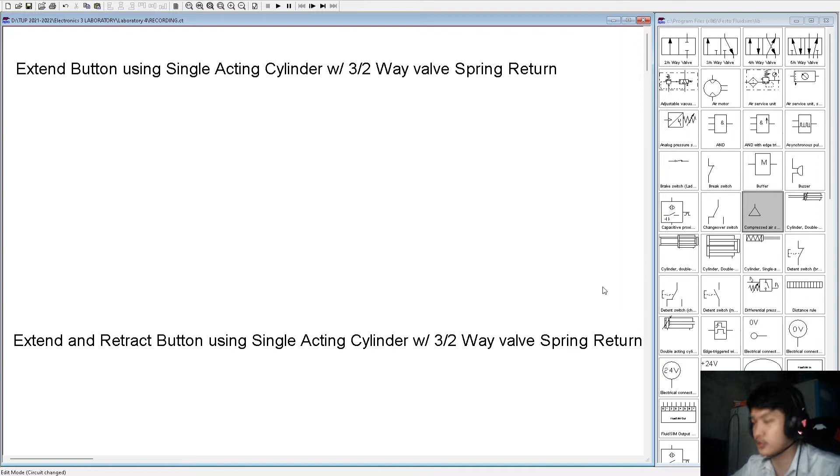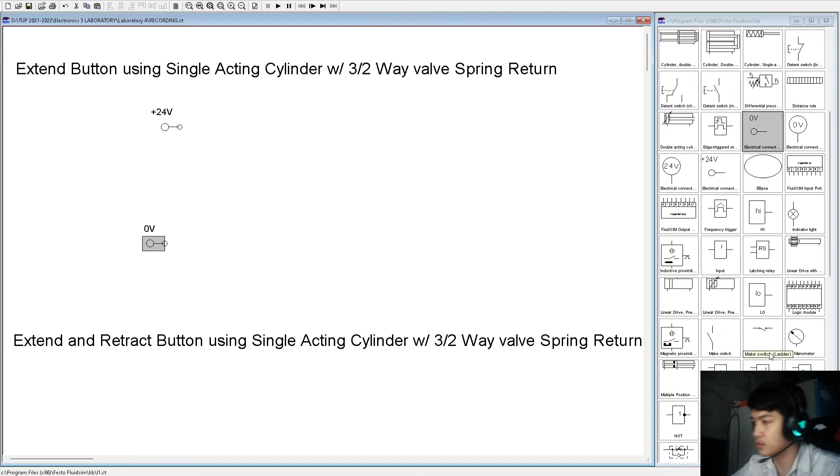Now, I'll be performing the extend button using a single acting cylinder with 3-2-way valve spring return. Now, I'll put the source, our ground, our push button, then the solenoid, our single acting cylinder, the compressed air, and the 3-2-way valve.

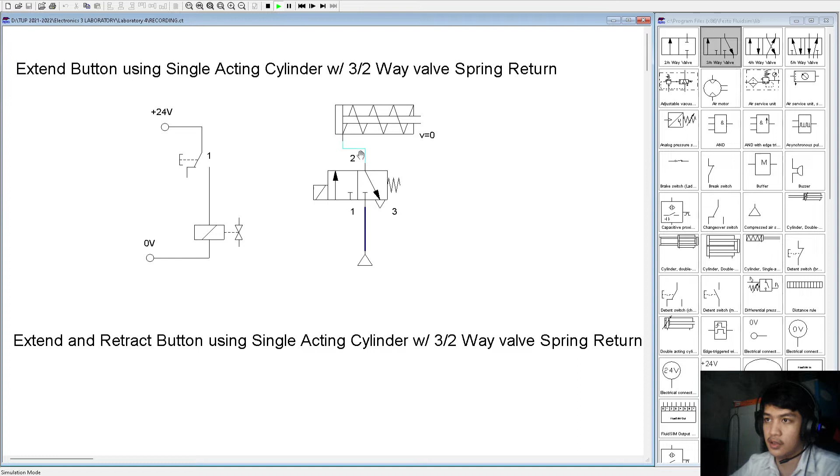So here in our 3-2-way valve, we need some electrical conductor, then a spring. So it will bounce back if our control switch is released. So now we will simulate it. As we can see, this is the compressed air, and here there is no air coming through the piston. So if we click the button,

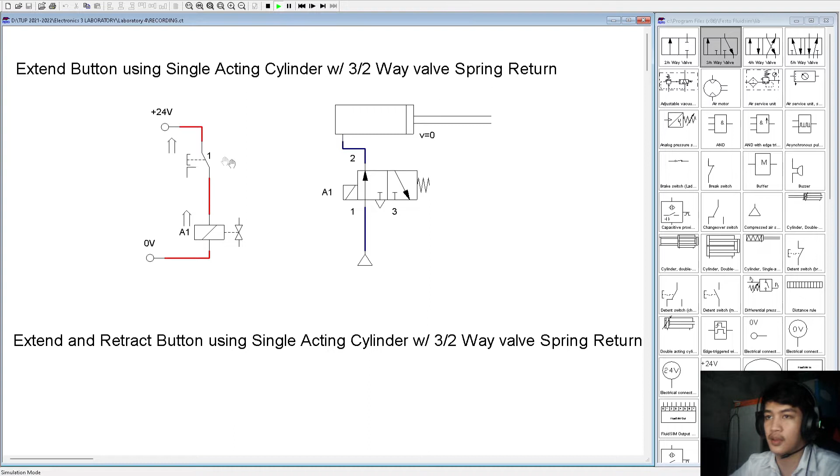we need to label our solenoid and the contactor. So this will be A1 and A1. Now, as we click our push button, it will activate the piston. And then if we release it, the piston goes back since we have this spring. If we don't have the spring, it will not go back like this. See? So we need the spring in order for it to bounce back.

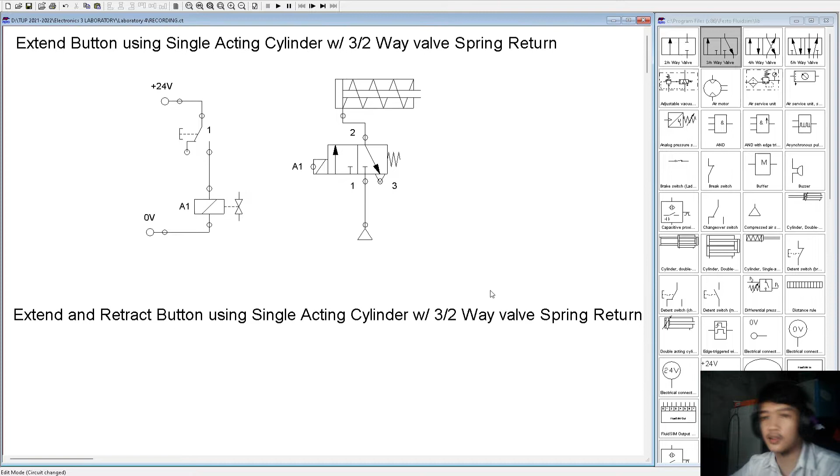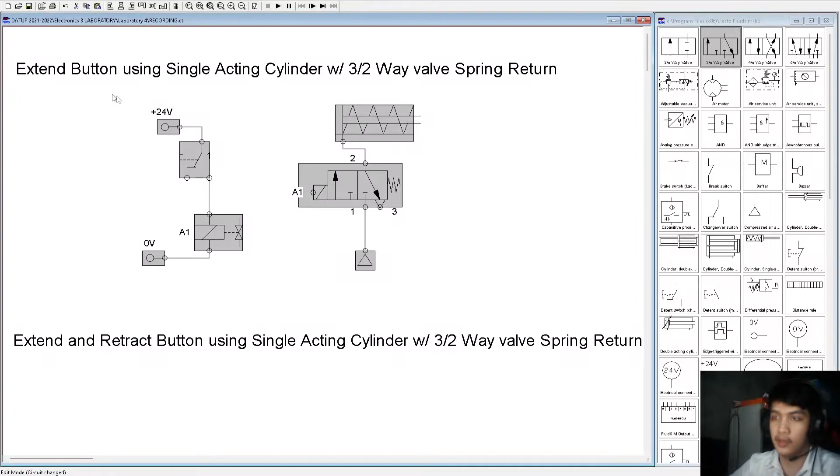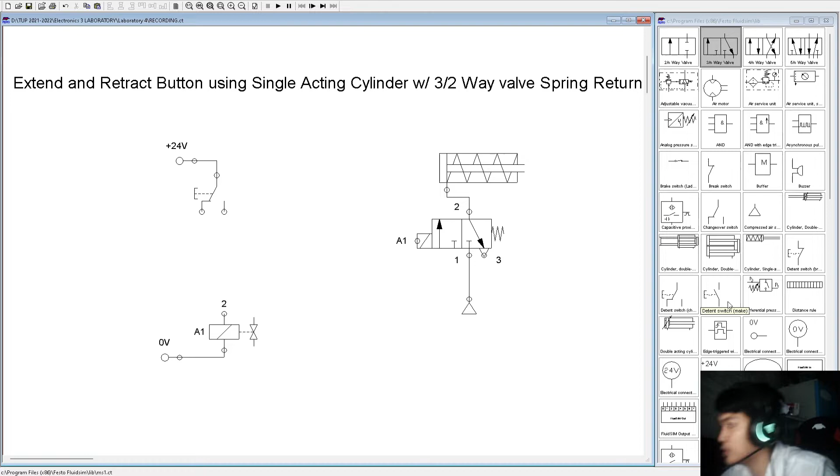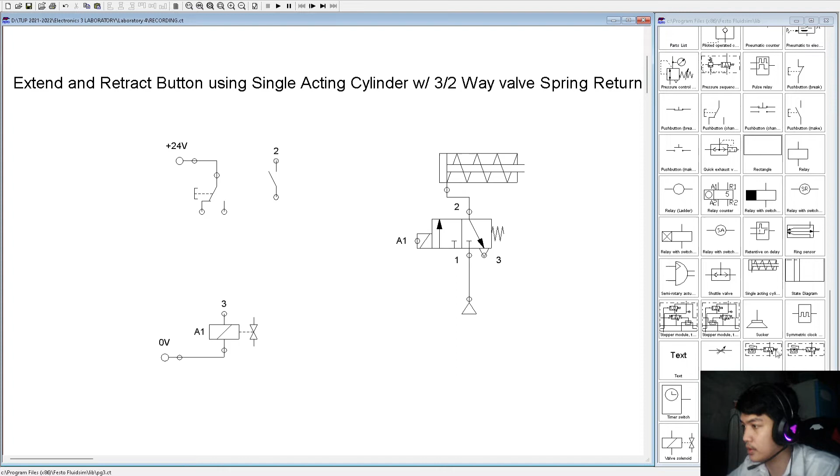Next is the extend and retract button using a single acting cylinder, also the 3-2-way valve spring return. So we will just copy this. And now in this extend and retract, we need a normally open switch, a make switch here, a relay, and another push button for the retract function.

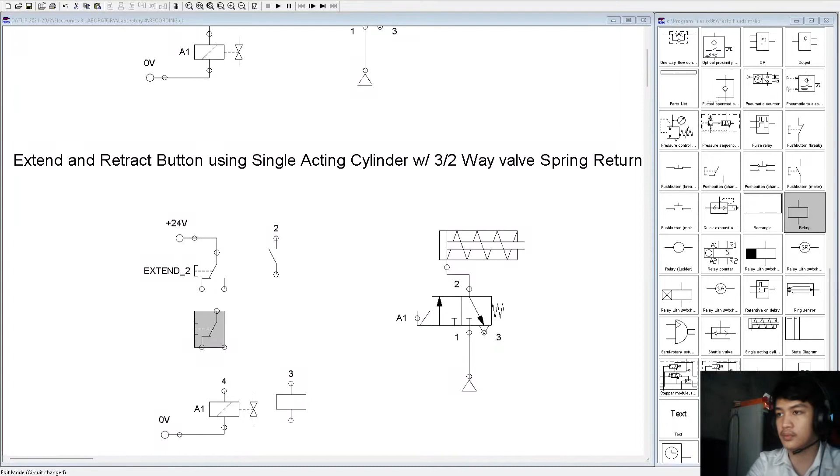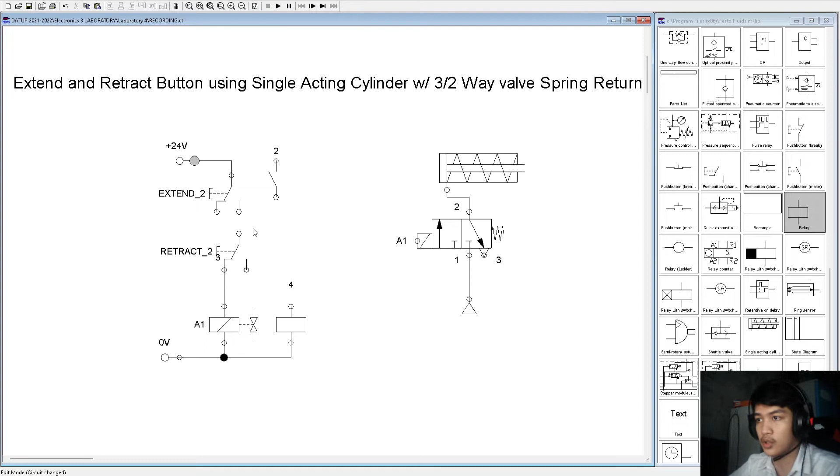I'll just label this extend 1. This is extend 2 and retract 2. Now we will connect the relay here, and this solenoid must be connected in a normally closed pattern. So connect this. This will act as a stop button. So if we put it here, then the contactor is connected here bypassing the start button, and the relay connected here.

Now we will simulate it. I'll put another label. This is B1 and K. Now, if we click this extend, this acts like a start button. So if we click this, the normally closed... Oh, I forgot to label the relay and the make switch. Okay. Now these two are 1.

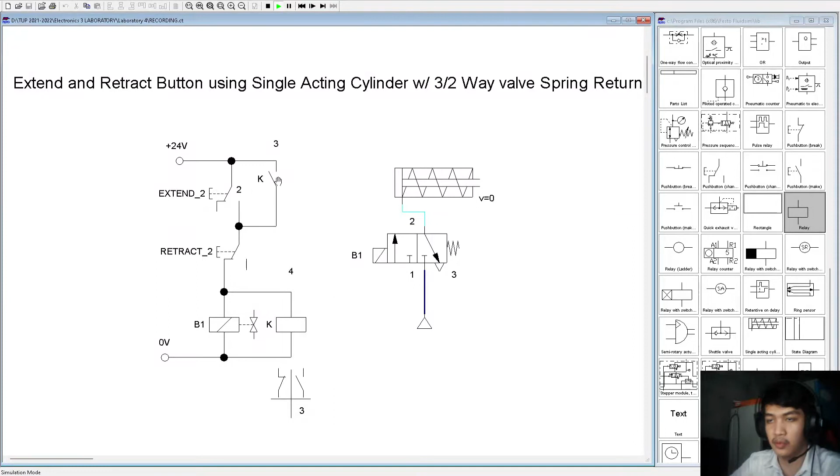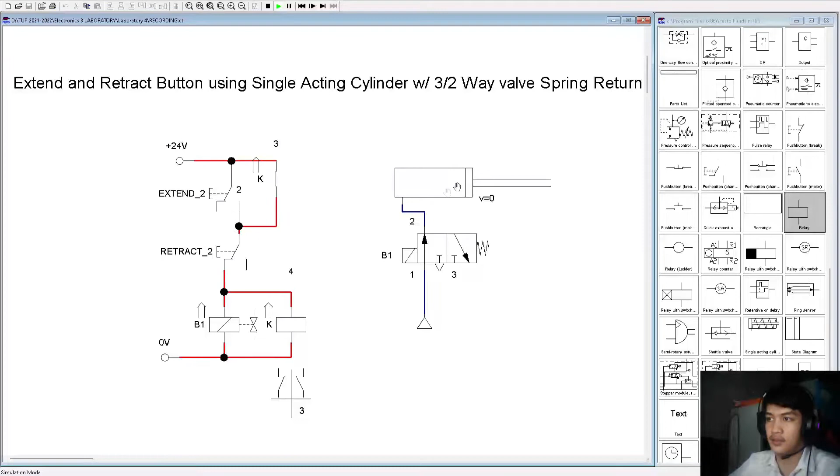Okay. So if we start the circuit, the connection from here will activate K, our relay, closing this normally open switch. So our piston will work as is, and it will not bounce back since we have a complete path of the circuit. So the retract will just cut off the connection, making it retract the piston. So it will go back here and serves like a stop button. Okay, start, extend, retract.

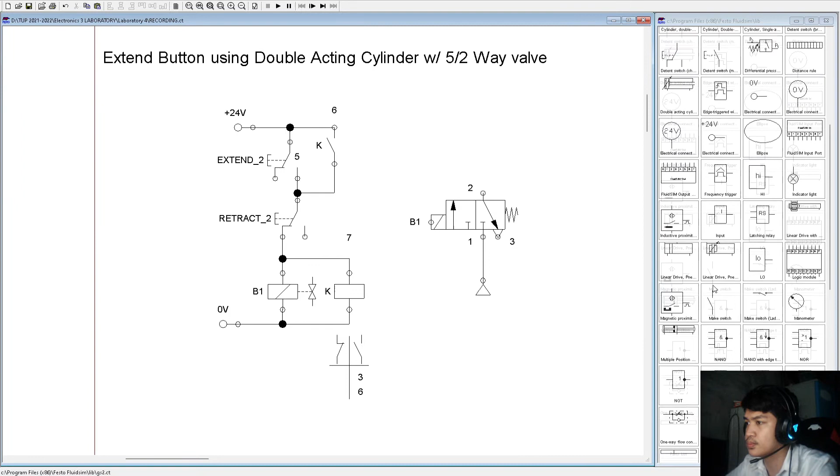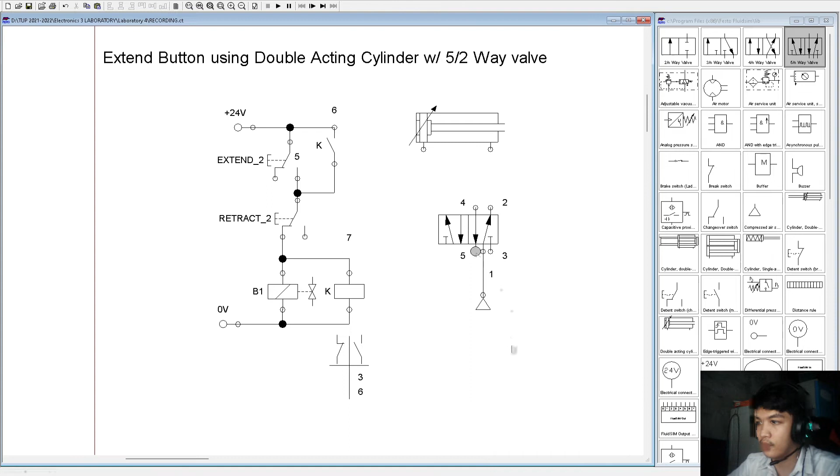Next is the extend button of double acting cylinder. So we will just replace this using our double acting cylinder. Now in double acting cylinder, we have two openings here that the air can come. Then we will replace the valve with a 5-2-way valve. Then connect the compressed air here, then the terminator in both sides, and connect it at the two ends.

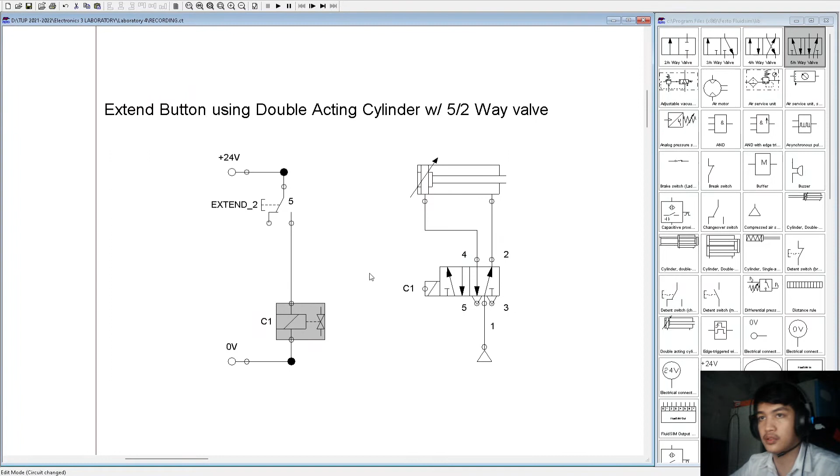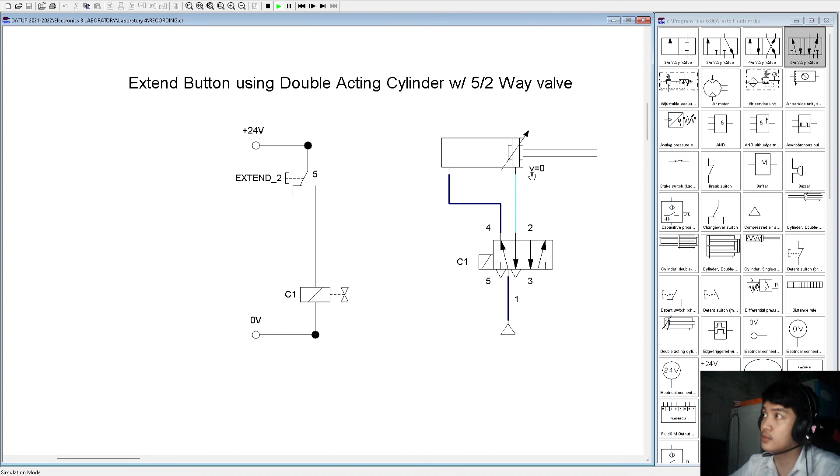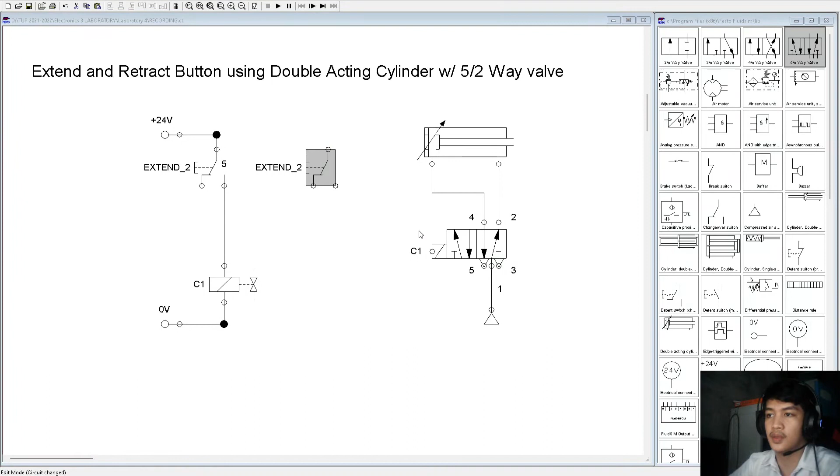So we will just copy this. Here is the extend and retract button using double acting cylinder with 5-2-way valve. We will just add some features, so the retract button will be used. I'll just connect the retract button in parallel here, and we'll just copy this. Put some solenoid here and here. Then we label it as D1 and this is D2. Connected here also.

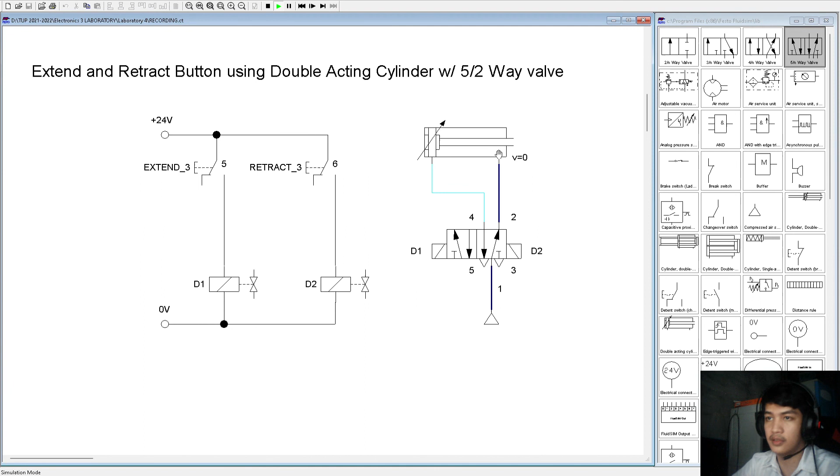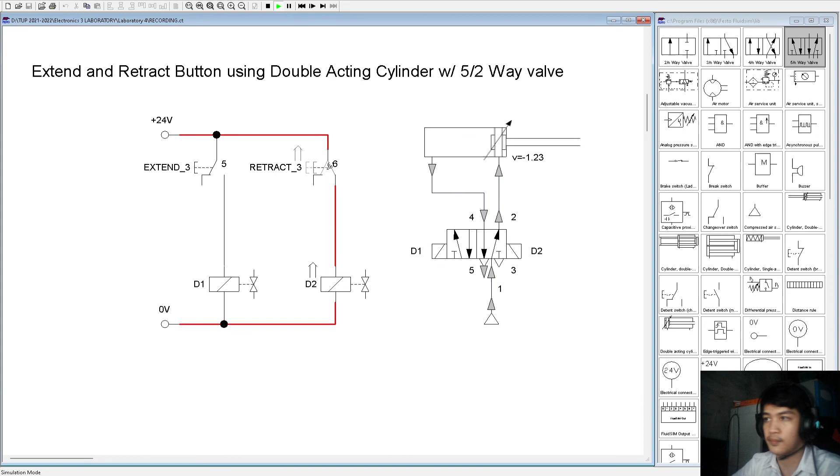Then here I will be placing a contactor also on the right side. So this is D1 controlling this, and D2 controlling the other one, labeled D2. Now as we simulate it, we have extend and retract. So initially we have compressed air here at the right opening. Then as we extend it, the piston will go to the right, since this will be pressurized, then when we retract it, the compressed air will go through here, then push the piston back. Extend and retract. That's all.